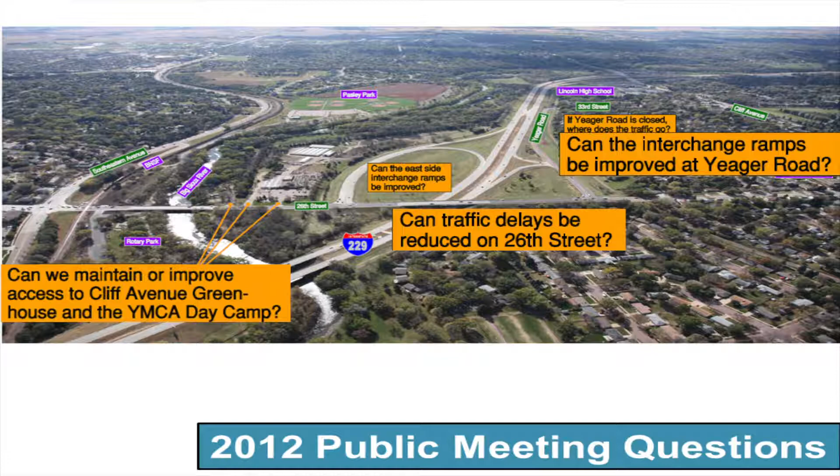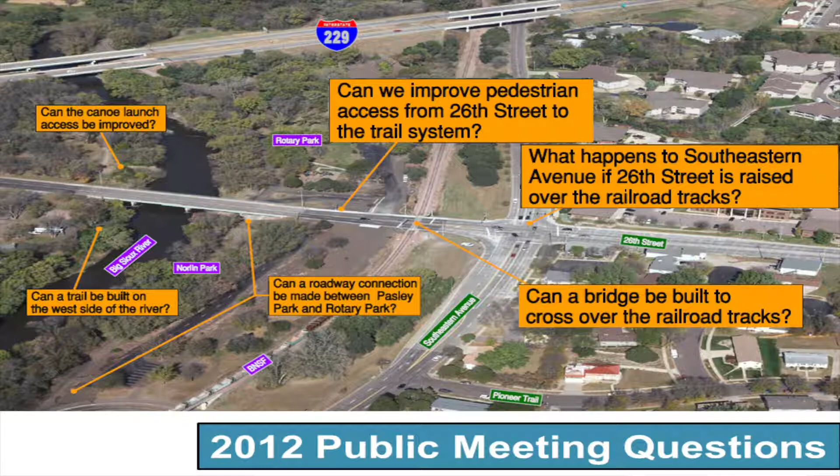We had boards like this that night, and all of the people that were there helped us to fill those out and try to answer some of those questions.

I'm curious, how many people were at that very first public meeting in 2012? Okay, a good number of you. And I know that many of you were faithful throughout the 4 public meetings that we held from 2012 to 2015. So thanks for being a part of this project. But we had no answers at that time.

What we did is we took your comments, we reviewed them, and from your feedback, we generated improvement concepts. So that was what we did.

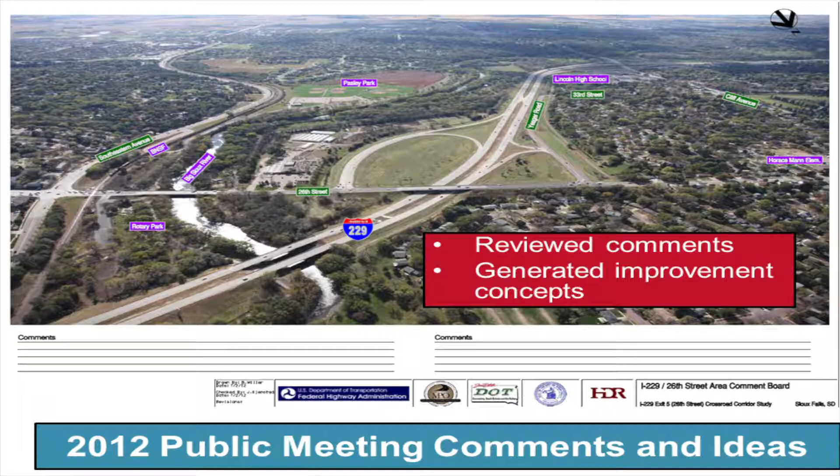All right, let's go to 2013. We came back to you in February, and we showed you those concepts. We also added more options based on your feedback at that February 2013 public meeting, and then we refined and analyzed and compared those concept options.

So let's touch on the things that we did in 2013. We came to you in February of 2013 with 9 different scenarios, 9 different options at the 26th Street and 229 interchange. This is probably one of the more far-out ones.

We had a wide variety of different improvement options. Based on the feedback that you gave us at the public meeting, we expanded the number of options to 20.

Once we got to that point, it seemed like all the feasible possibilities were exhausted. So that was where we ended up, with 20 different options developed after the public meeting.

At the 26th Street and Southeastern Avenue intersection, we came to you with 6 intersection options. And really, we didn't add any more options from feedback that we got from you, but we did make refinements to those various options. So that's what we came to you with at that February 2013 public meeting.

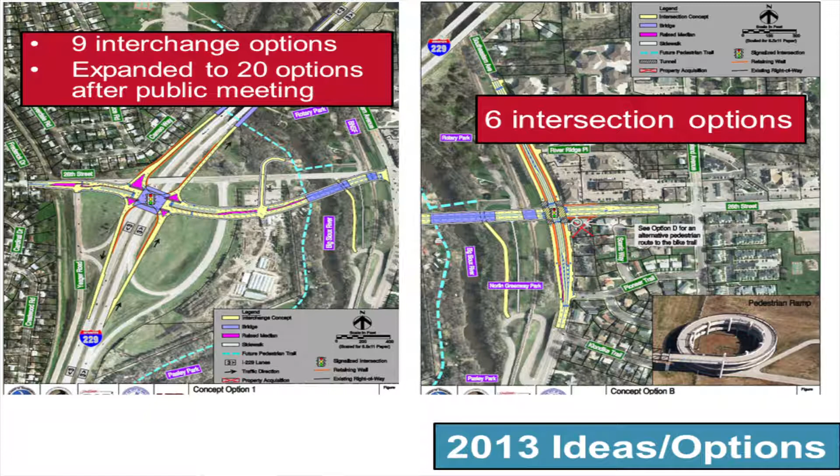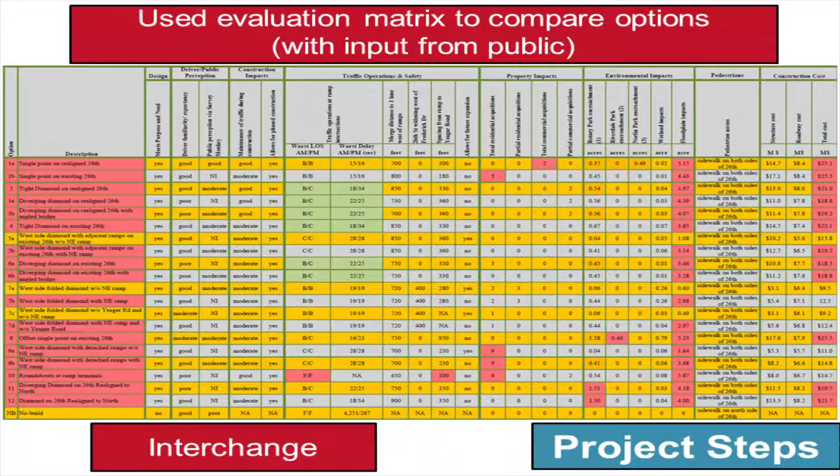Our next step was really to evaluate. I don't want you to look at the whole table here, but we used some type of matrix to evaluate. This particular matrix was used to evaluate those 20 different options that we used at the interchange, and the 20 different options are listed along the side here.

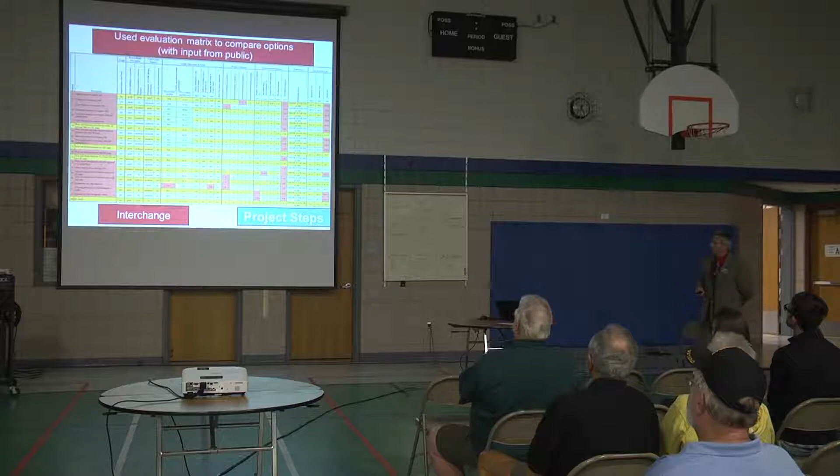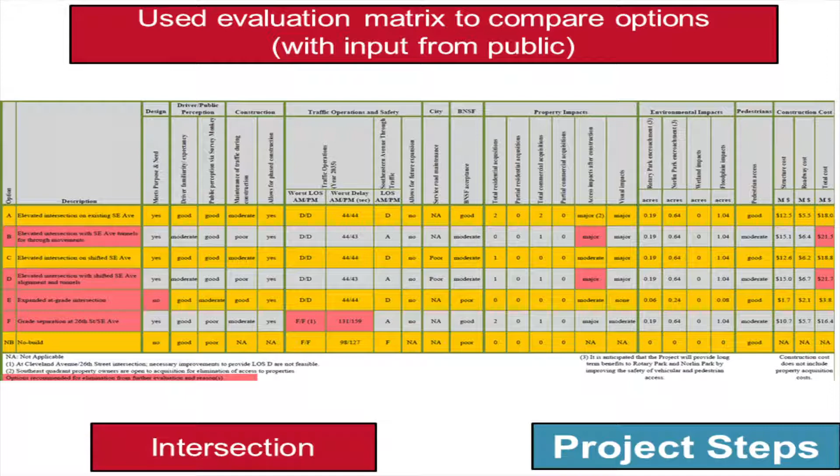In 2014, we came back to you in January. Using those matrices, we worked to develop animations, which you saw on the table over on my left. We also prepared an environmental assessment in 2014, which took us the bulk of the year.

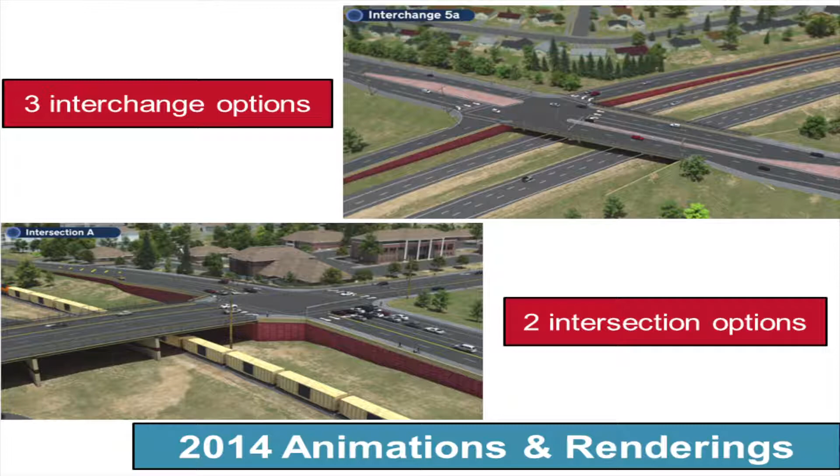At that 2014 meeting, we had 3 interchange options that we showed you in animations, and 2 intersection options that we showed you in the animations. We have those running over here on the little projector, and we also had those on our website. Quite frankly, we invested a significant amount of time, energy, and expertise to develop these animations.

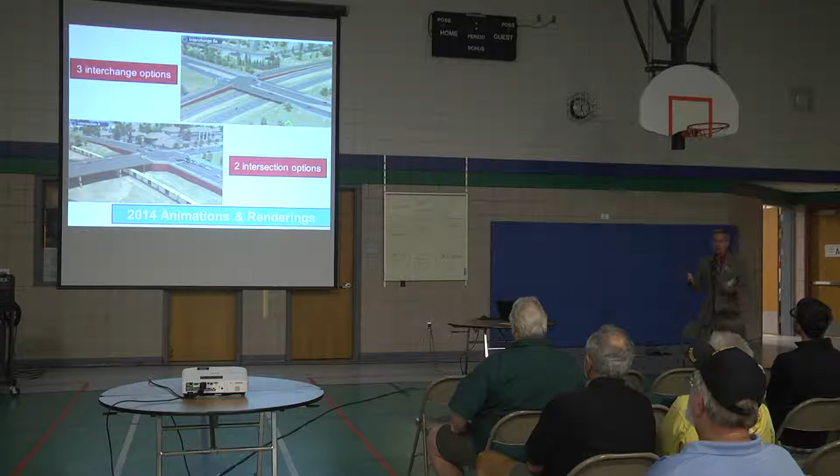I'm sure many of you were able to sit down at your computers and download them from the website or watch them from the website. What we found was that these animations really helped all of us, you folks and us on staff, to understand what each of these improvement options entailed.

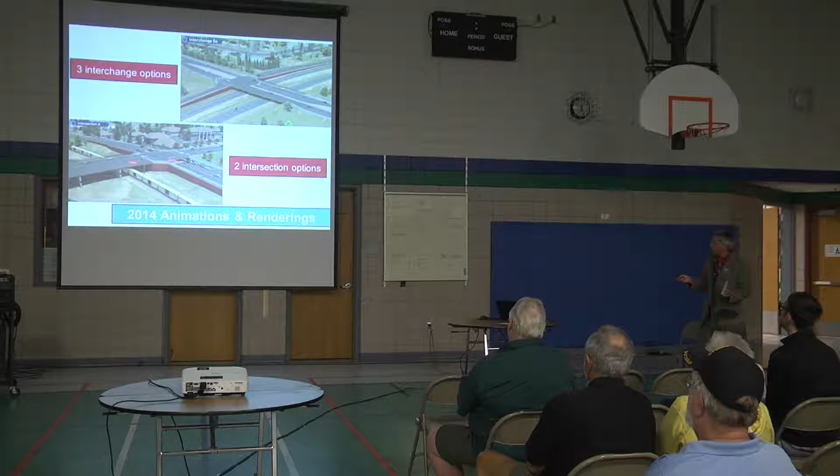By the time we got to developing these animations, we had whittled the number of feasible options down from 20 at the interchange to 3. That's all we really carried forward with the animations. And at the intersection, we only carried 2 options into the animation phase. Okay, that was what happened in 2014.

In 2015, we came back to you at the start of the year again, and we showed you what we anticipated was the preferred option. We got feedback from all of you, and I wouldn't say we had unanimous support, but overwhelming support for what we had recommended as the preferred option. We took that, and then we received approvals from state and federal authorities, and that then became the selected option. I'll show you a picture of that in just a second.

We also conducted surveys in 2015, surveys on things like topography, and we also began our detailed design work.

This is the preferred option, and just as a quick reminder, this is exactly what we had at that 2015 meeting. We had a loop here in the southwest quadrant of the 26th Street interchange, and of course we had our bridge over the railroad tracks at Southeastern Avenue. We brought this to you in 2015 as a preferred option and moved forward with it as the selected option.

Now, why did we do that? The real basis for choosing this was that it did accommodate all modes of traffic for the existing conditions and for the future conditions. In this case, we looked at year 2035 traffic conditions from a traffic perspective. It also was the option that minimized overall the different impacts that we had.

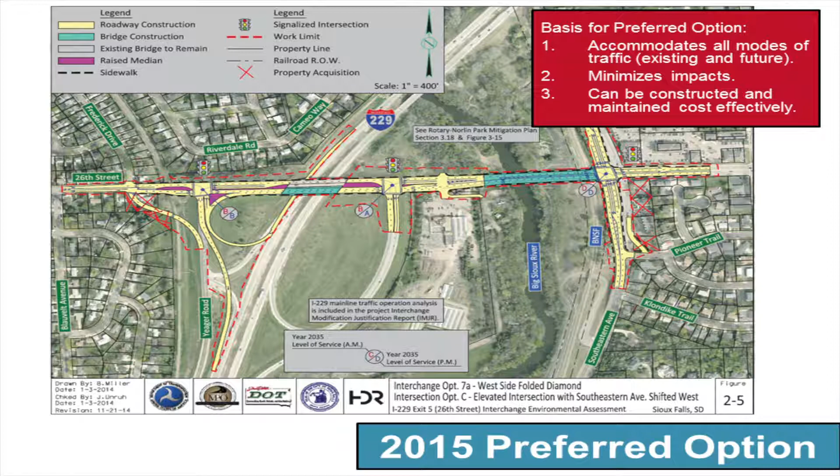And we did certainly consider cost. This option did a very good job of being cost effective from a construction and maintenance perspective. So all of those things were big factors in why we selected this as our preferred option.

This is actually the final signature page of our approval from, as you can see there, the South Dakota Department of Transportation and the Federal Highway Administration. This was signed just about a year ago, May of 2015, and this allowed us to move forward into the detailed design phase of the project. The actual title for this document, or this signature page, was the Federal Highway Administration Finding of No Significant Impact.

The bottom line is that this option had the least impacts of all of them and was really the best option for this project.

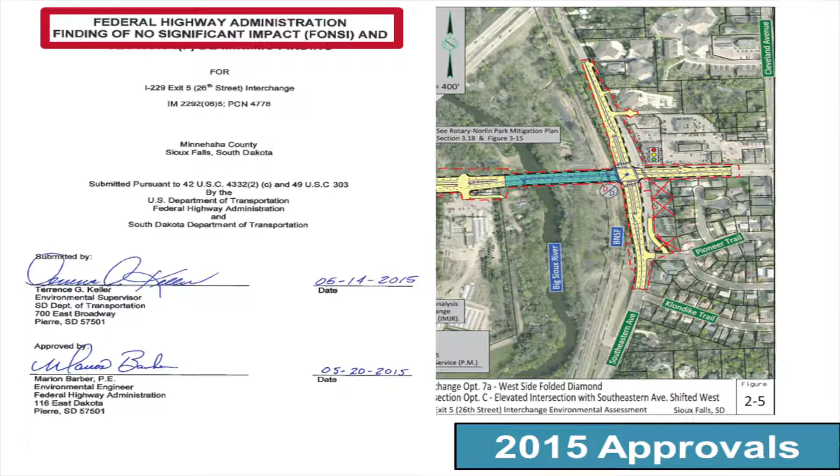From there, we moved into the detailed phase. I'm sure many of you saw the HDR survey truck out there last fall and during the winter. Infrastructure Design Group also had a survey truck out there last fall, so I'm sure all of you saw those trucks.

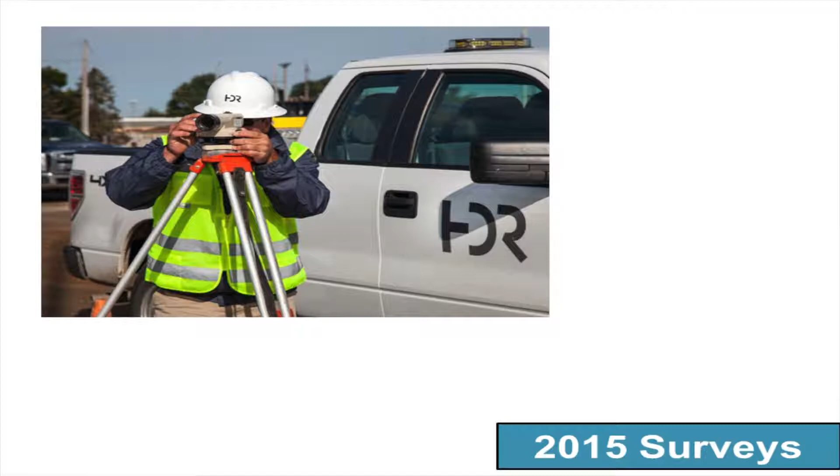Okay, let's go to 2016. I hope you're seeing that we're doing a logical progression of where we're going, where we've been, and where we're going on this project. Here we are tonight in May, updating all of you on the project.

The next thing you'll see is soil borings that will be done, and we will continue our design plans. We will meet with landowners, and we will also begin to acquire properties.

Did I say intersection on that? I meant interchange if I said intersection. Okay.

Although the project has been split into two teams for design purposes, the intent is that it will all still be constructed at the same time, with no delay from one project to the other for construction purposes. The interchange project is being headed by the South Dakota Department of Transportation, assisted by Infrastructure Design Group with the design. The intersection project is being headed by the City of Sioux Falls, and HDR is assisting the city with the design. Because of the scale and magnitude of this project, it takes two very capable teams to actually accomplish the design.

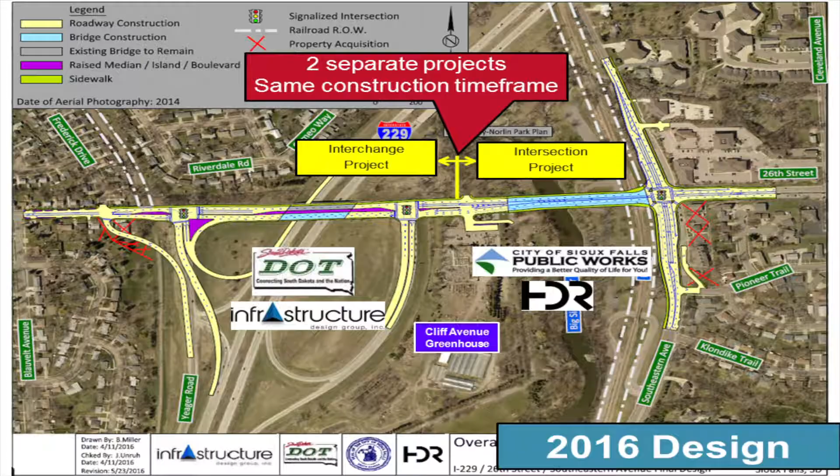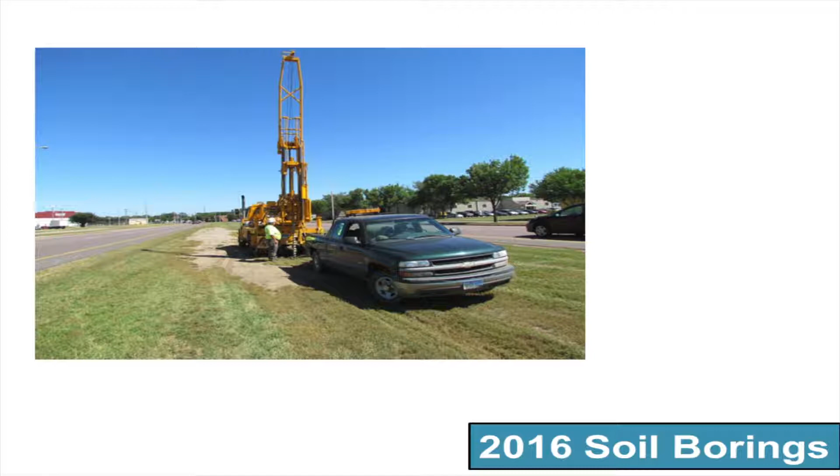Okay, this is what you're going to be seeing out in the project area during the summer. This is the Department of Transportation drill rig. They will be taking soil borings near the surface and very deep below the surface to help us with the design of the various features of the project.

Okay, 2017. We will continue to meet with landowners. We will continue to update the website. Hopefully all of you have found that useful throughout this process. We'll continue to prepare the design plans, and we'll continue to acquire properties.

Now, I have some interesting pictures here I think you'll like. This is probably the biggest part of the design, the bridge—actually, two bridges. This is a picture of the existing bridge over the Big Sioux River. There you see 26th Street and Southeastern Avenue. The existing bridge is 300 feet long and 53 feet wide.

Here is our rendering of the new bridge. This bridge will be 650 feet long and 95 feet wide—much, much bigger. The big factor is we have to go up and over the railroad tracks, so that's why this thing has to be quite a bit bigger, plus to carry more traffic lanes.

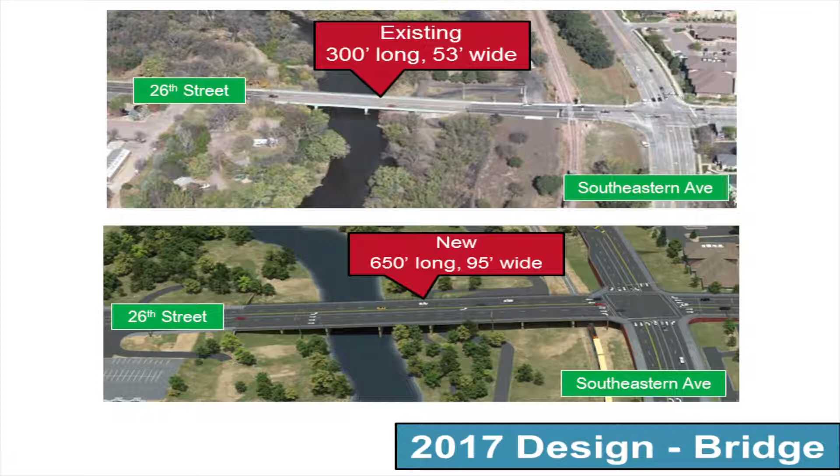We have another bridge on this project, the bridge on 26th Street over Interstate 229. The existing bridge there is about 57 feet wide. What we will be doing with that bridge is not necessarily making it longer, but just making it wider—adding about 55 feet to the width of that existing bridge, basically to carry more traffic lanes. That's why.

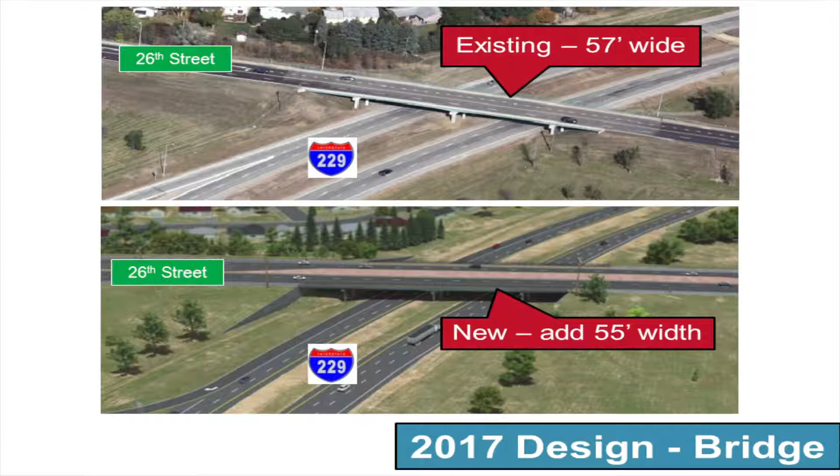Well, what are some of the things we look at with bridge design? One thing is different types of railings, and maybe different types of patterns that we might put on the concrete of the bridge. We'd like to use some different color schemes on the bridge as well, so that it isn't just your typical gray concrete boring bridge, sorry to say. We're also looking at different pier options—these are the structures that support the bridge. And actually, I put 2017, but this could be 2016, 2017, or 2018.

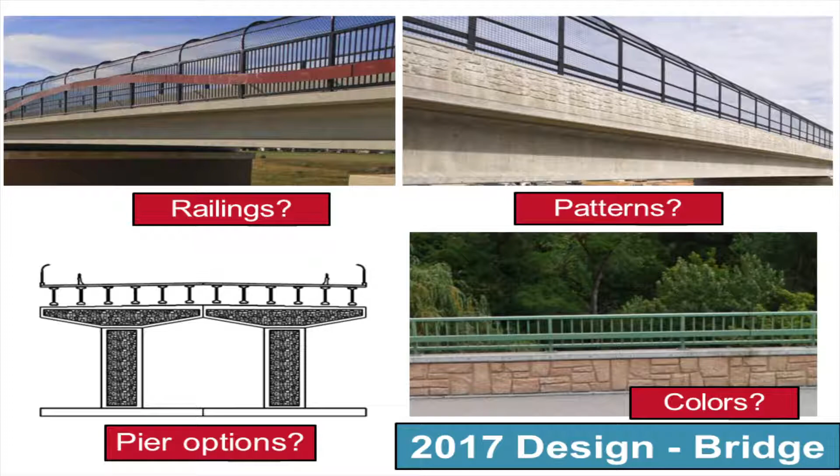It's an ongoing process during these three years. We have a lot of retaining walls on this project, as you've seen on the animations. This is actually one of the renderings or animation clips that we have.

So far, we've shown just a dark red for these retaining walls. Maybe it might be okay to try some different patterns on these walls, and this, by the way, is from Sertoma Avenue on the west side of Sioux Falls. Maybe it might even be okay to look at some kind of murals on these walls. This is actually from the 69th Street project, just a couple of miles south of 26th Street, very close to where we're at here. And if we really want to get crazy, we could do something like that.

As a follow-up for all of you, we need you to drive around Sioux Falls and find out where this picture was taken, okay?

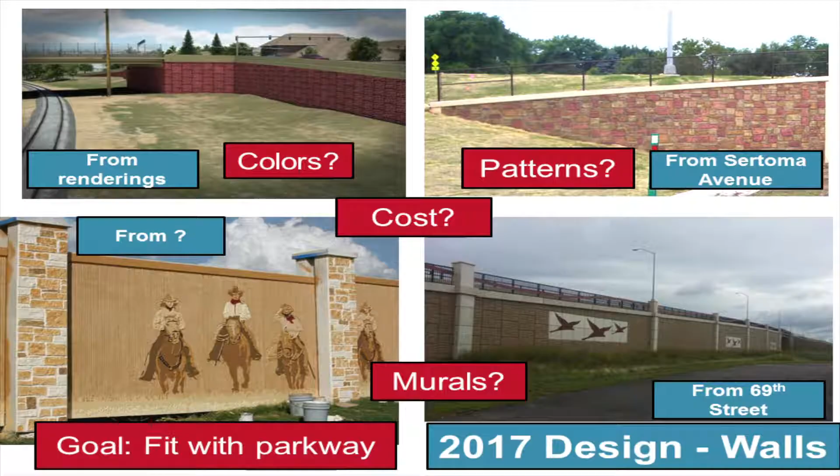Really, our whole goal with the bridge and the retaining walls is to make it fit with the parkway. The City of Sioux Falls has a phenomenal resource in the Big Sioux River Parkway system, and this bridge and the retaining walls will be very visible from the parkway system. Every part of this project will be utilized by all of us and our descendants for 50, 75, maybe 100 years. So let's take some time and make it pleasing and something that looks nice.

And of course, along with that, we always have to consider the cost as well. The person basically leading the charge on the different aesthetic treatments, maybe the different mural types, is John Jacobson. John, can you raise your hand back there? If you have any ideas, that's the person we would really like you to give those ideas to. Lots of neat things we can do, but we still have to be cost effective with it.

All right, the Burlington Northern Railroad. We're going to hopefully eliminate that. How many of you have been in that lineup of cars as the train went by? I've been sitting there many a time, and I'm sure all of you have been there too. Afterwards, it will look something like this, where the train will zip by underneath and we will be driving on a bridge over the railroad tracks. This picture is actually from the 57th Street project, again just a few miles south of 26th Street.

But there is a very rigorous process to receive BNSF approvals. This little screenshot we took was from a submittal we made to BNSF just about a month ago. Certainly they are very much in favor of putting a bridge over the top of the railroad tracks, but they still have a very rigorous review process that will take a good part of three years to get through.

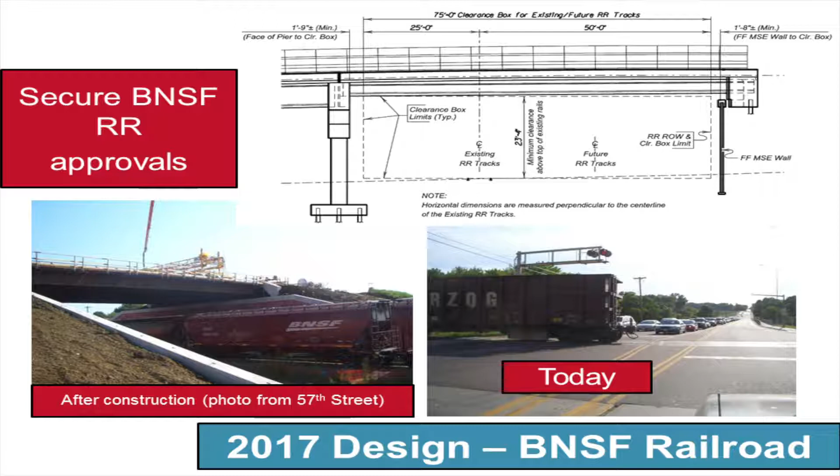All right, and then 2018. We will come back to you with another public meeting, and if necessary, we'll come back sooner with a public meeting. We'll finish our design plans, and we will begin and finish construction of a new park. It's called Rotary-Norlin Park, and this is a sketch of it.

Really, the key here is that when we start construction of 26th Street, we will sever the connection to the Big Sioux River Bike Trail. That's the problem, and we have to have a connection to the Big Sioux River Bike Trail before we start construction of 26th Street. This new park is on the west side of the Big Sioux River.

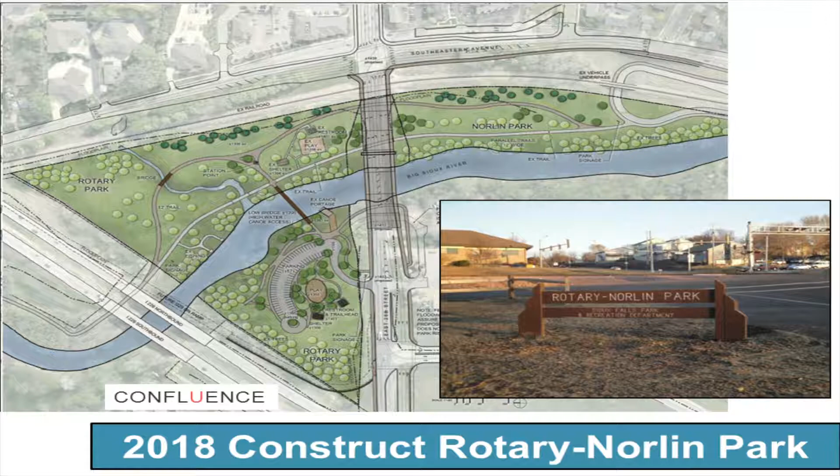Here's Interstate 229, here's 26th Street. This is just a bunch of basically overgrown trees here, and then there's a canoe launch. This is where the relocated Rotary Park will be, and this will be the new access to the Big Sioux River Trail. That has to be in place before we begin 26th Street construction and sever that access. So that's why it will be built in 2018.

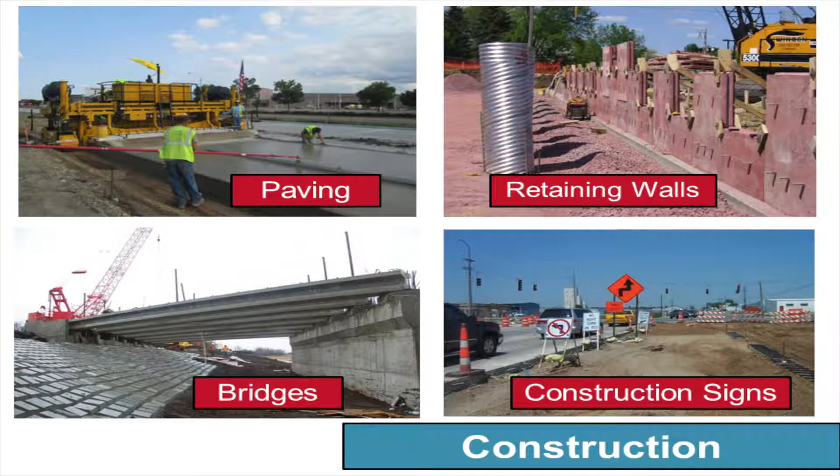2019 is when we forecast construction start. You will see paving operations, retaining wall construction, and a lot of bridge construction going on out there, and what we all look forward to are the construction signs—unfortunately a necessary evil for building a new roadway when we're very close to existing roadways.

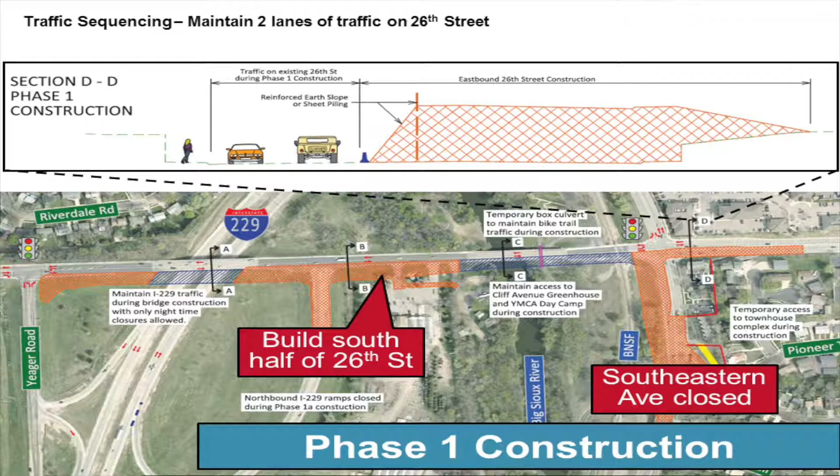The toughest place for construction is just on the east side of 26th Street, on the east side of Southeastern Avenue, where 26th Street gets raised up by roughly 25 feet. So how do we do that? Here is existing 26th Street—we will essentially narrow it to 1 lane in each direction, and we'll be building a large embankment for the future 26th Street. We'll have to put some kind of retaining wall or engineered fill to fit everything into that roadway section. That will be the most challenging part of the construction process.

During Phase 1 construction, the northbound I-229 ramps will be closed—maybe not all of it, but certainly for parts of Phase 1.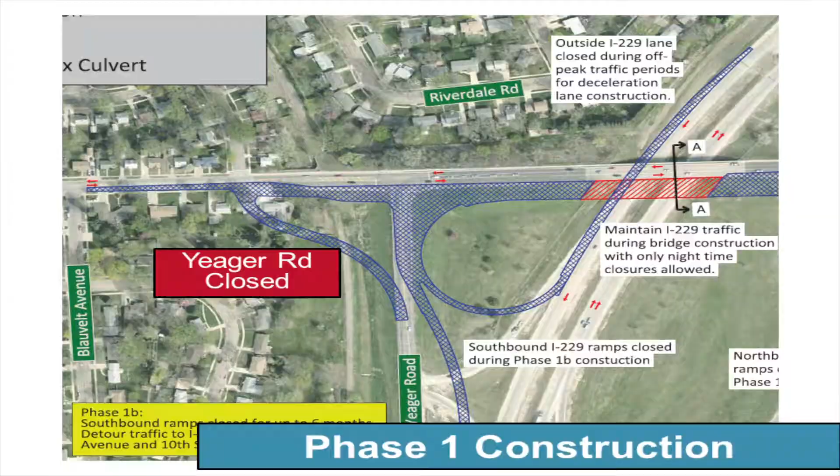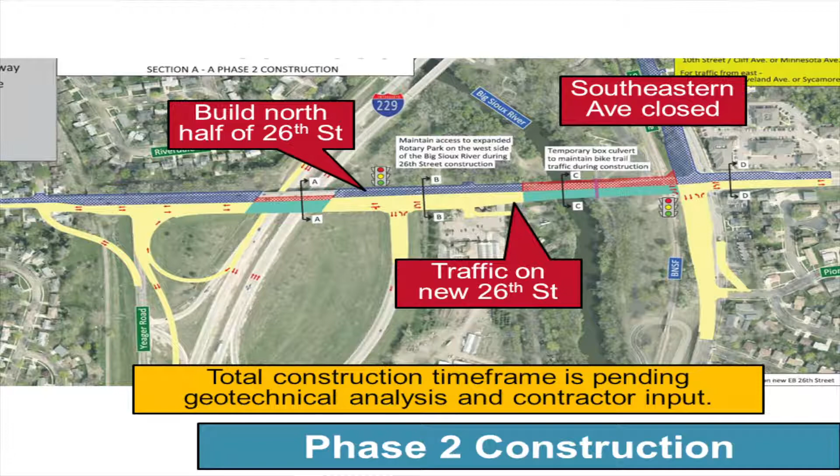For Phase 2, we just have one slide here, no sections, but we want to point out that we'll be building the north half of 26th Street during Phase 2. Southeastern Avenue north of 26th Street will be closed, and all of the traffic will be on the new lanes of 26th Street that were just built. So that's our general concept with the maintenance of traffic during construction.

We are not 100% certain how long this will take to build. We are waiting for the geotechnical analysis, where they'll go out and take soil borings, and we'll get recommendations for geotechnical work. We also intend to meet with contractors to determine the best way to actually build this over a period of time, and what kind of time period we're looking at. So we do not have the answer for the overall time frame.

This is again how I took you through this process. Hopefully it was helpful for you to see what's been done, what's happening now, and what's ahead.

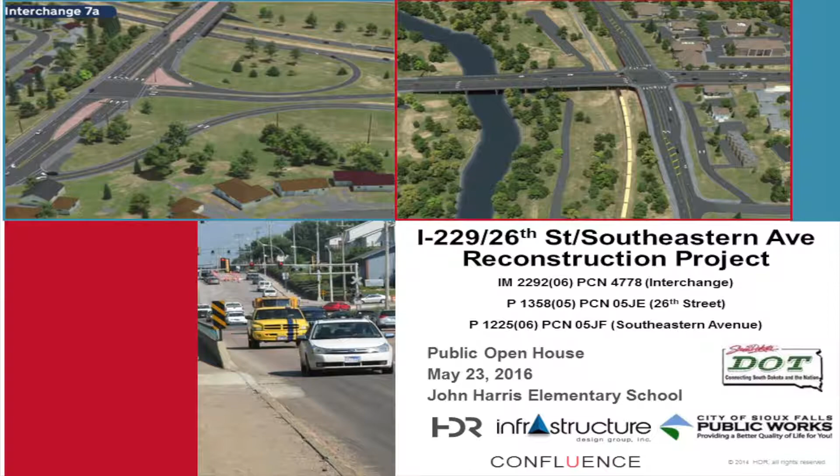Okay, hopefully this was helpful for you to get you caught up to speed on what's going on with this project.